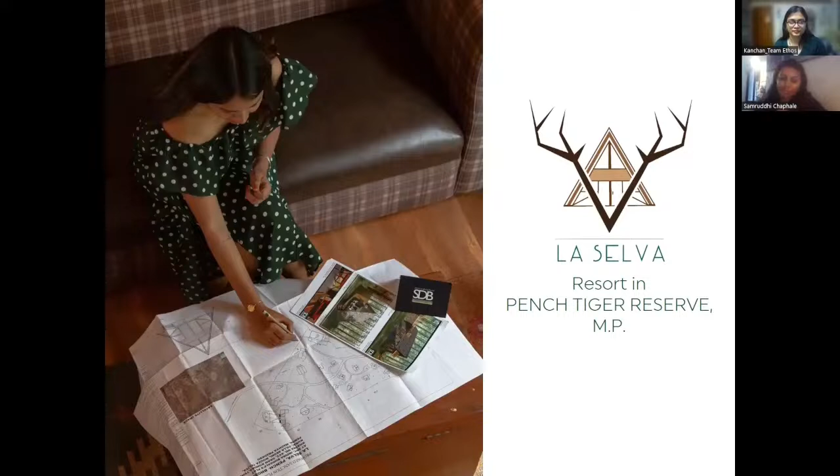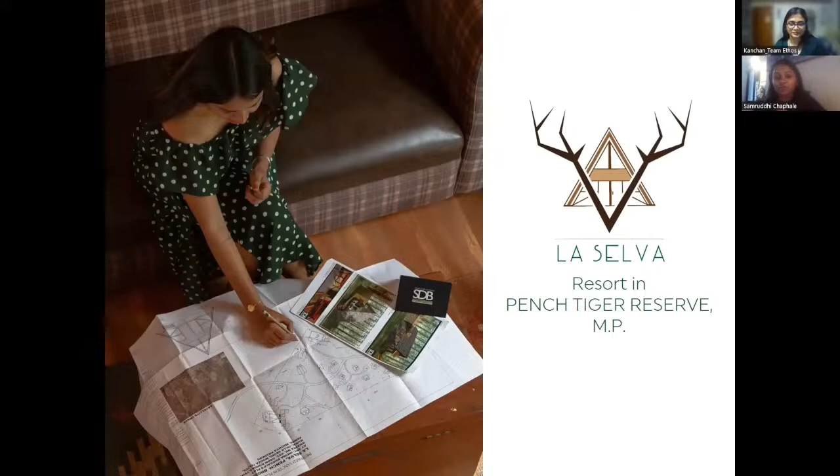Right. So the first presentation is about my recent project, La Selva Resort in the Pench Tiger Reserve of Madhya Pradesh. This project has been very close to my heart. First of all, it was the time when COVID had hit. That's the time it had accelerated and then we had to push it back. So it took almost about 2 to 3 years to complete. But the way it has turned out, I think it will really deliver on the topic design around environment.

Now, when I visited the site, it was during the summers. That time it was a fall season wherein a lot of leaves had shed off. And still when I was at the site, I could see the proportion of the site being that of a boomerang. I'll show you in the next slide, the master plan slide, where you'll see one flank of the site is completely dense forest versus the other side is a farmland, and then you see forest ahead of it.

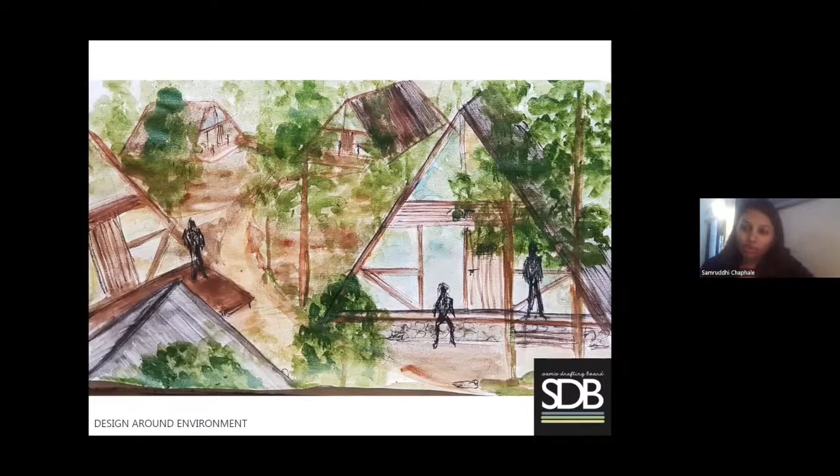So my architecture had to respond in such a way that it is overpowered by nature versus architecture overpowering the nature, which is why I thought of going for organic design. Wherever I find a spot where there are no trees, I'm going to put my built block.

So this project is a resort. There are a few amenities like the pool, reception block, of course some utility block, restaurant, spa, and then there are some places to live, like cottages, tents, dormitory, these kinds of things.

So all the residential parts, the quiet areas where you need privacy, are placed in the foresty zone. And then I secluded that by placing the dormitory, the kitchen, and the pool on the farm side. Also, the placement of the pool is strategic because it is situated in a farmland where afar you see the forest silhouette. So I've also raised it to a height of 8 feet. Then you will be able to appreciate the beauty of nature in a better way.

And it was such a wonderful project in the sense that the first 4 to 5 site visits I had to do only to understand where I'm standing. Because anywhere I would stop by, it would look as if I'm in the same spot, because all the trees look the same. So the triangulation method that we generally apply to place a block was just a supportive drawing, to be honest, because I had to make sure I'm standing there.

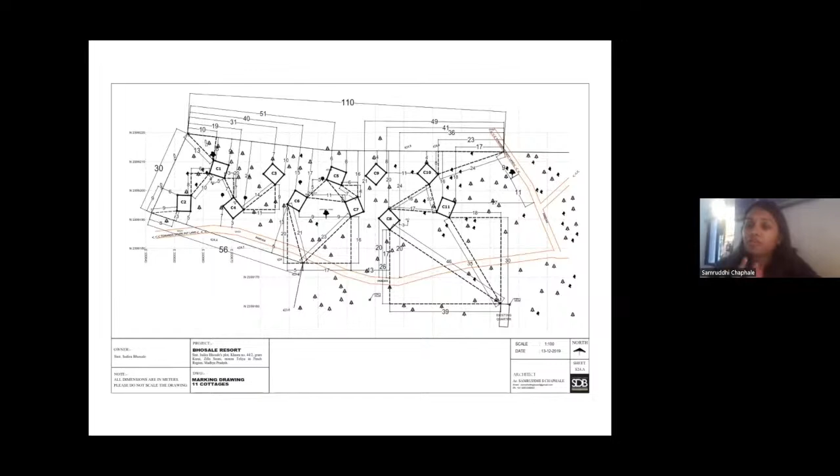So this was a visual presentation of why I picked the A-frame. Now, the A-frame is a structural system built mostly in the West, firstly because of the weather conditions, and secondly because of its very unique form. It is a traditional form, but it's not practiced so much because there are a lot of unused spaces, since it keeps receding at the top.

But then for me, here comes the approach. Especially today in the modular industry, architecture has also become a little product-based, where people are selling modular structures. There could be two approaches to it. One is to highlight the structure too much. And second, you are context driven. You want it to form a part of your site, and that's why you're designing it.

So I went ahead with the approach that, okay, A is a very strong shape or a strong profile, but I am utilizing it because it will look cozier. It will fit in the context well. You almost can't see the second cottage, the way it is placed.

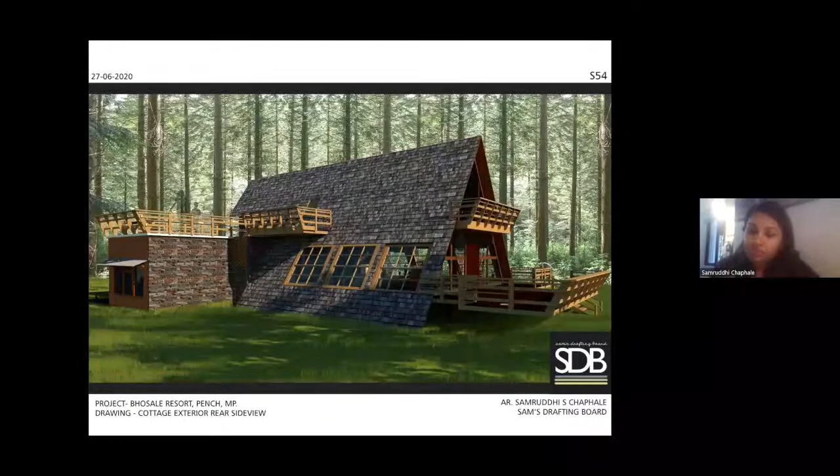And of course, the material palette, the glass used, the shingles and their color, the wood, the interiors with the wooden cladding, make it look more tucked in and more nature-like. So that was the approach, and I think it has served the purpose. Once I show the final pictures, you'll have better clarity. So I'll just flip faster. These are just regular floor plans to understand.

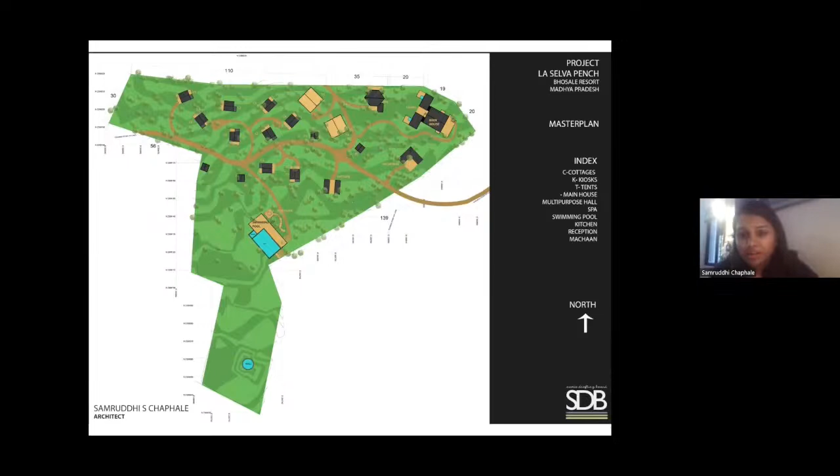And the reason for it was, there was this one tree which was not like the mahua trees. These are the mahua trees, by the way. But there was this one evergreen tree in the forest, which was huge. And we loved that tree so much that we wanted it to be a part of the project. So trees were a reference point, just to say.

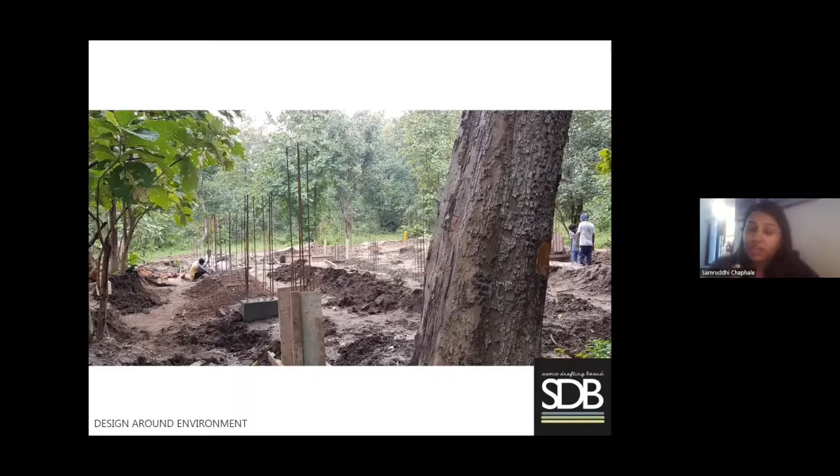So the base structure, substructure is RCC. Also, I have ensured that there is not too much wet construction happening here, so that we save on the resources and we make it as close to and relevant to the environment aspect as possible. So because it is a bigger structure, a bigger span, we had to go for an RCC foundation and footing and columns being raised to a certain height. And this is how you see the slab getting.

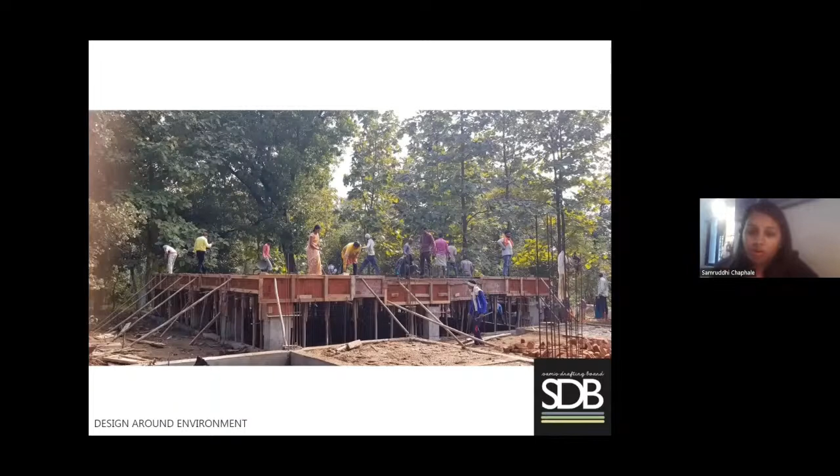So there is a reason why I have raised this particular block to a certain height. It is raised at 1650 mm. One, not too much to make it inaccessible for somebody who is not so good at walking, but B, also because I wanted to make sure that when you're standing at the deck, you only see the trees and nothing else. You don't see the bark, you only see the leaves surrounding you, and that is pretty much achieved in this one. So this is how the structure kept going.

Now in this particular picture, you can see how the steel has been stopped at the beam level. But in my design, I wanted the roof, which is also the wall component over here, the shingle bitumen sheet that I've applied, to go all the way down. So for that matter, later on, I've added extensions which are lighter in weight in steel to support the profile of the form. These are certain technical details.

Now here, this is a structural detail given by my structural consultant, but a lot of things you need to change on site also, obviously with due permission and understanding. So what I understood was I don't need an offset from one of the sides. There's no need. Why is this offsetted beam made?

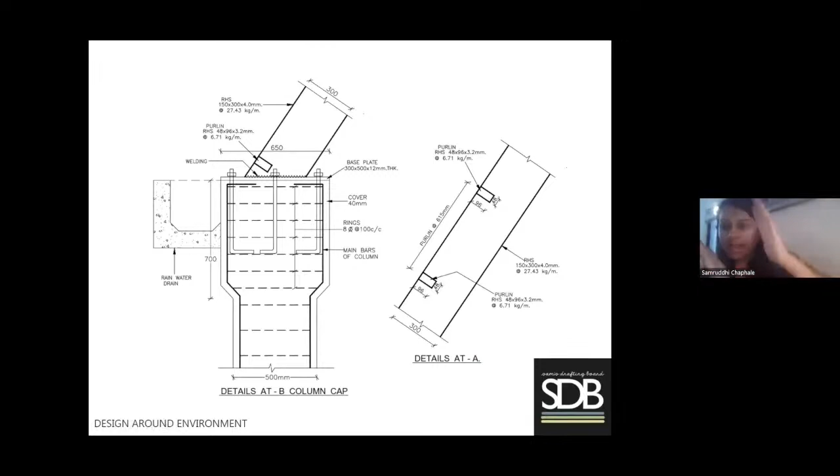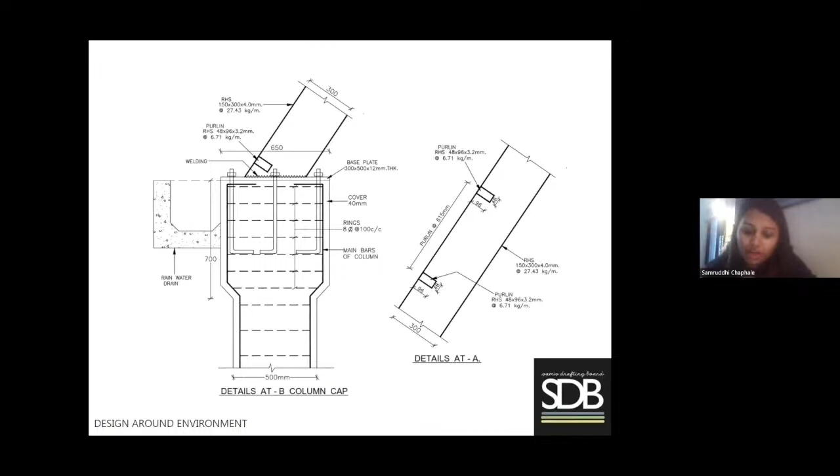Because the A-frame is an angular shape. So as it touches the horizontal plane, say 300 mm is the pipe size, but when you place it and cut it horizontally, it will be larger, right? So I don't need offset on one side, and I changed it on site. So these are certain logical decisions that you need to take while you are at site. And this is the particular detail that I was talking about. I don't need to create an offsetted beam on either side.

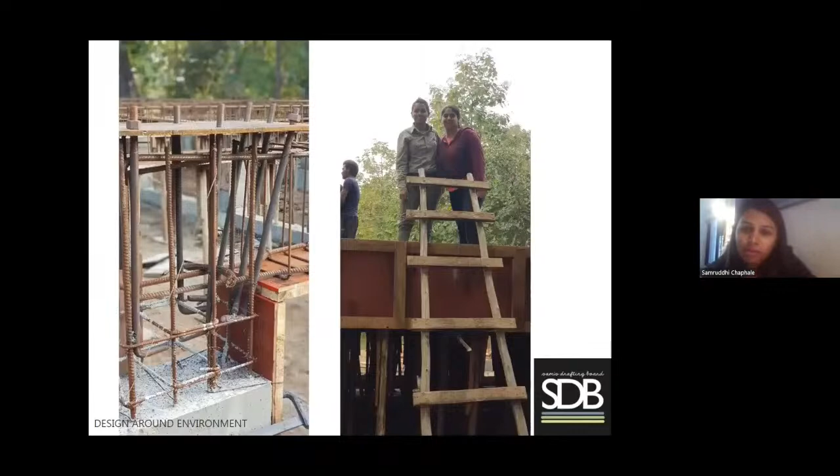And this is one of our pictures during the first slab that happened. It is me with my intern, Palak. And these are certain technical details in terms of the roof, the entire structural part, the plate that holds it, the gusset plates and the purlins and the principal rafters.

I wanted to make sure that the structure doesn't look too heavy. So, even with regards to the decision at what height the horizontal rafter should come into picture, whether there is a mezzanine also, and whether it will come at the eye level, all these decisions are very important. So accordingly, the structural integrity was planned.

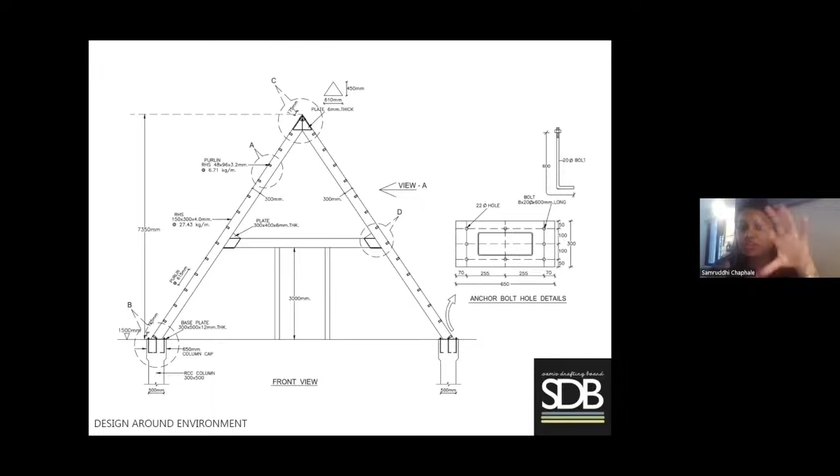Angle: now there are no set methods or set drawing regarding what angle this should be. I have referred to a few A-frames wherein the angle of the A-frame is such that it is too pokey, it is too steep. But I derived my own derivation of keeping it at 66 degrees, which gives me a very good proportion and a very good slant to the A-frame.

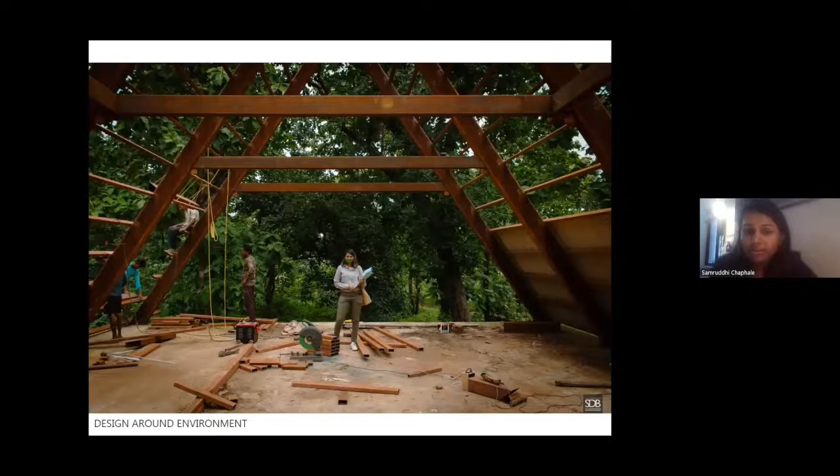So this is how it looks now. You can see in the background, there is the tree I was talking about. And it is only at this height that I'm able to have that deck feel I was talking about. Here, the deck is not constructed. In the next few slides, you will have it. So this is how the steel construction is used for the superstructure. And step by step, you can see the construction is happening.

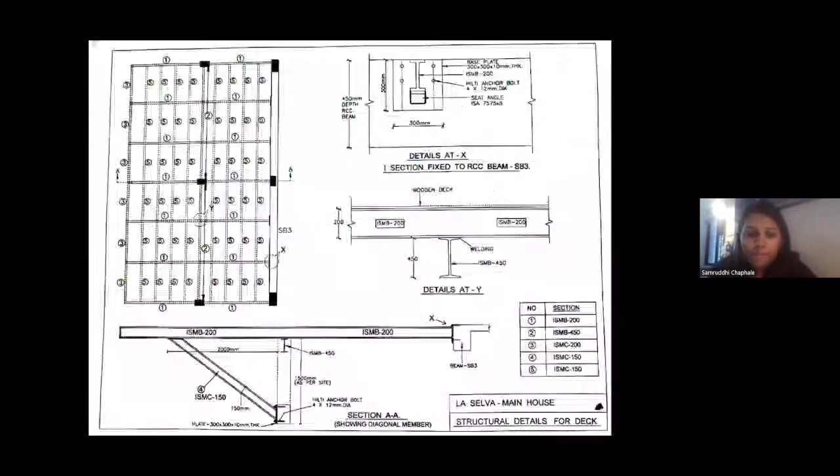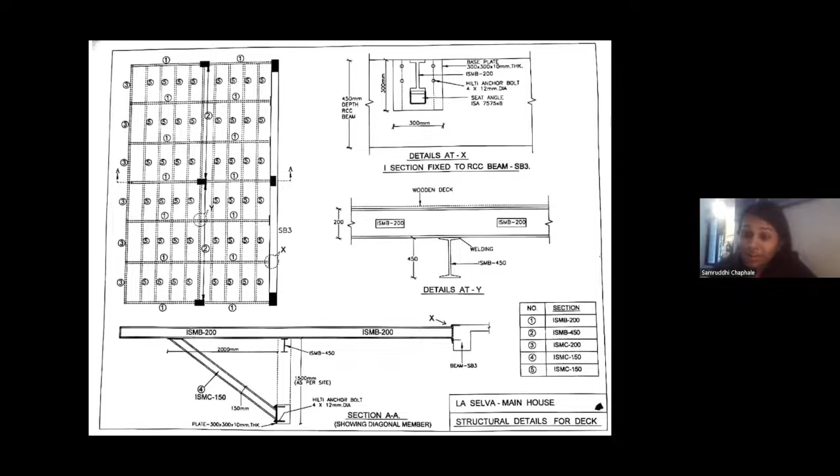So, very important thing, this deck that you see in the picture, it was very important for me to again have it cantilevered. So this slanting detail that you see, in angle, you can see that ISMC 150. That detail is very important, because if I had gone for RCC, like again columns, then it would have made the whole structure look not floating, very boastful, which I didn't want. I wanted this huge structure to actually get merged in the nature. And as you'll see the pictures, you'll see how these little decisions are really important. When you see the final pictures, you'll understand.

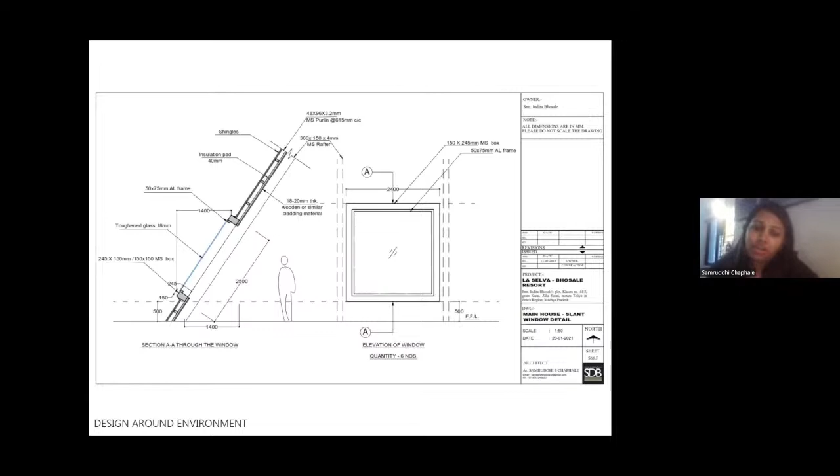If it is not properly welded, or if there is no proper silicone filling done, or that L detail that I'm talking about, you cannot stop the bitumen sheet or the cement sheet bang on at the joint. You have to turn it around. If you don't do that, leakage will happen. The wooden cladding from the inside will spoil. So these are very important details that you need to take into account. And this is that particular picture that I was talking about, why the boxing is important.

You can also notice the little balcony that I have put in the back. So this structure has a mezzanine on top, and that will be used for recreation. It could be a pool table or a cards room, those kind of things. And I just thought there could be a nice, cute little balcony coming out, and you get to experience nature from a different perspective. So I'm trying to create these focal points here and there. People go to the jungle to appreciate the jungle, and that has to be best achieved in whatever ways possible.

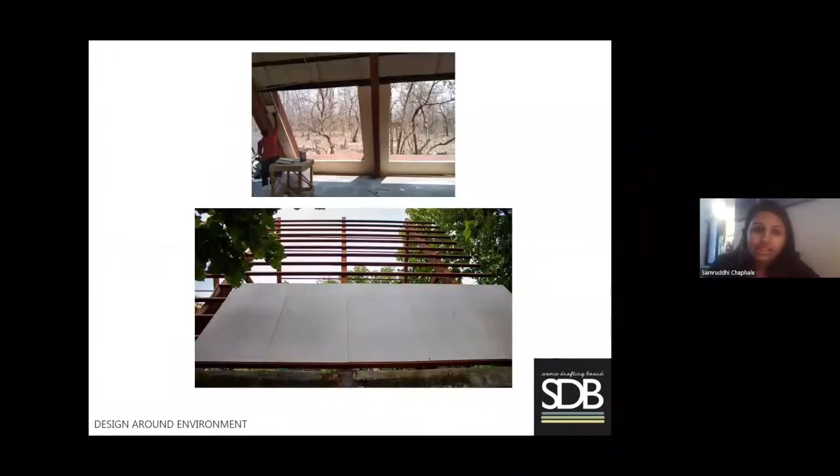So this is the tree. I'm highlighting the tree way too much, I think. You can see the internal cladding and the external cladding in these two sheets. And this is that structure. Such a big structure, and the decision of having a cantilevered deck was so important, because you can't see anything. The supports that are holding that deck are not visible at all. And even though it's such a huge deck, at a height of almost 27 feet, you can't see the structure at all.

But there were some reservations. I mean, I had to do a little RCC construction as well, because of the utility part and kitchen part. So the kitchen block is on the left, and the general manager's room is on the right. And now I'm taking you to the cottage. I'm not showing you the final pictures right now. This was the construction of the restaurant, and I'll quickly take you to the rest of the blocks now.

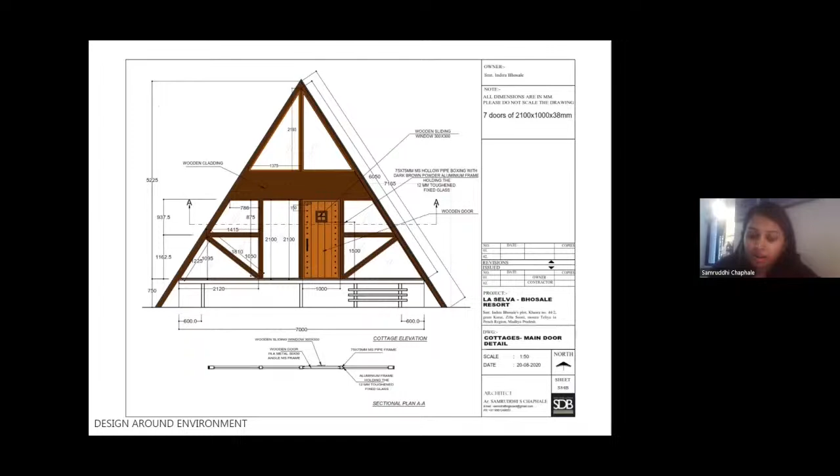So I'm not putting too many slides with the plans and all those details, just showing you the form and how the glass is cut very differently in this particular elevation. Just to add to the little drama, this is being done. And these were just some visuals to make the client understand. But this is what the construction is about. Again, it's a steel construction. The little bit of civil work you see is only the toilet block.

Interesting part about this is these were haphazardly placed again. I had to make sure that it's first tucked in the forest. So wherever there were too many trees in that belt, I have placed it. Secondly, it has a deck on the front part as well as on the back part, right next to the toilet block. So a lot of times, wherever I'm placing that block, there was a tree right where the bathroom is coming. So I have actually flipped the internal plan to accommodate that tree.

So the bathroom comes on the left, and then the whole furniture layout, if the bed was on the left, it would go on the right, and vice versa. So there's no ego when it comes to nature. That's what I'm saying. You need to alter your design when you're dealing with nature.

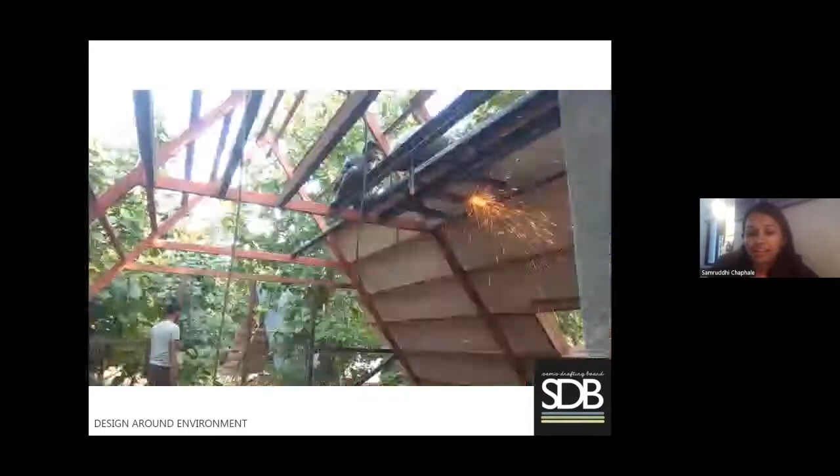And yeah, the mezzanine is getting fabricated, and I'm just showing step by step the structure. Notice the scale. Look at the size of the leaves and the size of the human on the left, and then the scale of this cottage. It is almost hidden. These are some of the window details. In the drawing you see a casement window, but I have a regular sliding window in practice. This was one of the options. And you also see I have dared to have certain skylights, or certain fixed glass, on the sloped portion of this. It has really added that touch. You'll notice it in the final pictures.

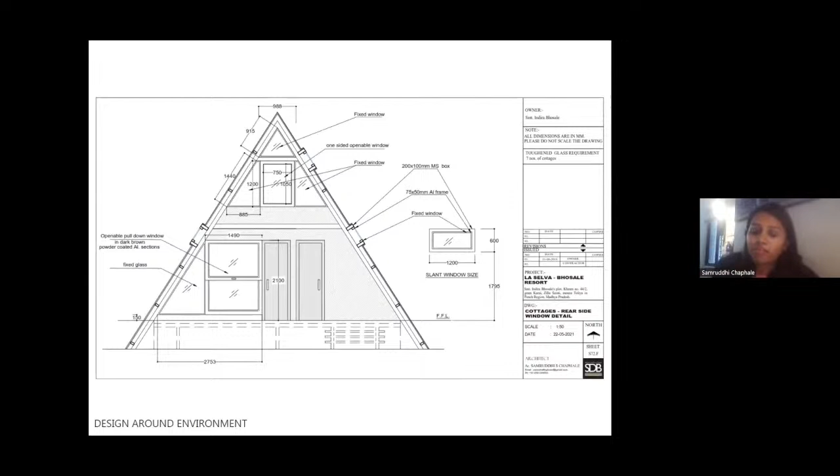Ventilation has been very well taken care of. On the top you have a sliding window, in the bottom also you have a sliding window, so there's no problem with that. This is a funny picture wherein the workers have just come out from that particular fixed glass. Yeah, and these are some of the cottages in the middle of the construction. You can see the shingles being poured, the cement sheet, the internal wooden cladding. Look at the selection of the veneer.

We were not very sure of how to access the mezzanine because the block is cozy. So we went with numerous options of having a ladder, of having an L-shaped staircase, but then we ended up having a spiral staircase, which you see being put here. It went very well with the circulation and the overall furniture plan.

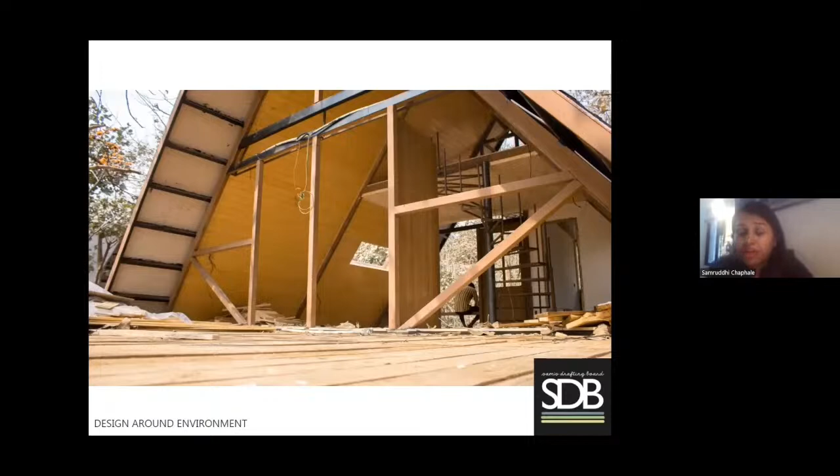These basins are also custom and tailor-made in wood and oiled so that they don't spoil with water. And things like having all three sides with glass, so that even when you're in the bathroom, you enjoy the beauty of nature. As I share the final pictures, you'll get to see it. And very little details, as you see, I was trying to develop this toilet paper holder. Whatever pieces of wood were left, we tried to make something out of it. Such details are very important. The finer details actually give you that end result.

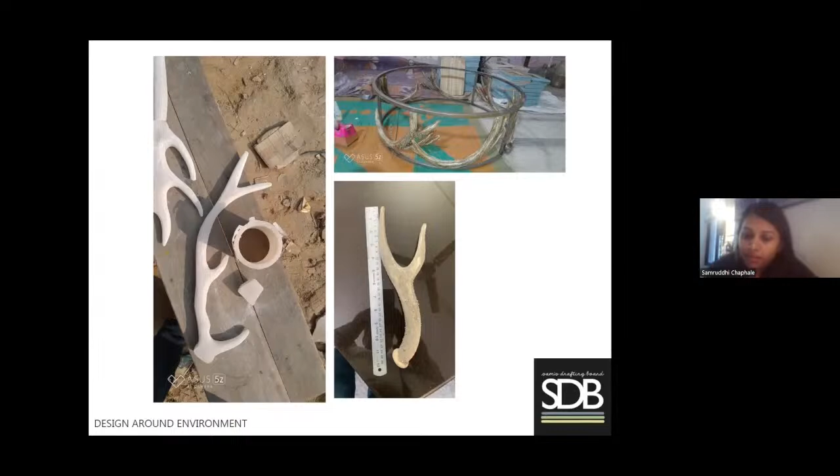Now I'm taking you to the tent before I reveal the final pictures. There's a tent block. It's a tubular steel structure. Again, there's a lot of usage of glass in order to make sure that you have the inside-outside connectivity. So these are some of the blocks that are pending. I'll show you quickly, not in detail, with the shortage of time that we have. So it's a canvas structure, which is why it was important to go for tubular steel details. Otherwise, how will you hold the fabric, if there are too many joints to it?

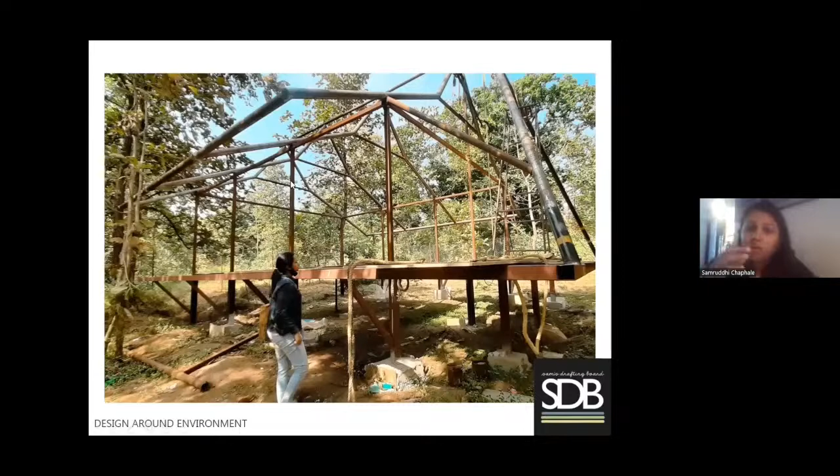Hence the tubular. If you notice, this tent structure is not a regular tent. It has been tailor designed to suit the A-frame concept that is going on through the project. So notice these little triangular scoops, which still make it closer to the theme running around the whole property. So this is how it was while it was developing. Just one of the plans and elevation, just to explain, this is how it looks now.

Now coming to the swimming pool, as I was saying, it was such an important decision for me to raise it to 8 feet height. Imagine if it was at the ground level, you wouldn't be able to appreciate nature the way it is being appreciated now. And I utilized the lower part of the swimming pool for utilities such as the shower areas, the cubicles, the basins, and all those things. So this is just a layout and a section and some side photographs to show you how much context matters for you to take the decisions.

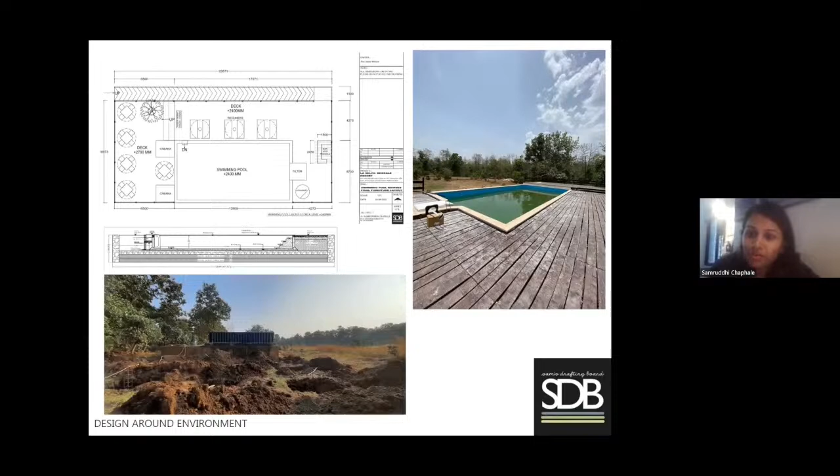Also, if you notice, all the cottages are in the forest area, whereas the swimming pool has a backdrop of the forest but a view to the farm. So I hope you're getting to understand the drama. I hope I'm able to deliver that to you through my speech, what I'm trying to say about when these decisions matter. And this picture completely tells that.

You see the backdrop of the forest. So the swimming pool is bang on marked at the site where the forest meets the farm, on that border, literally. So you see a little bit of forest at the back, and as you see on the front, it's all farm. Notice this long ramp that is actually taking you to that height. So it is comfortably accessible for anybody to utilize it. It's well proportioned at 1:12. So you have this ramp followed by the deck, and then you have the pool.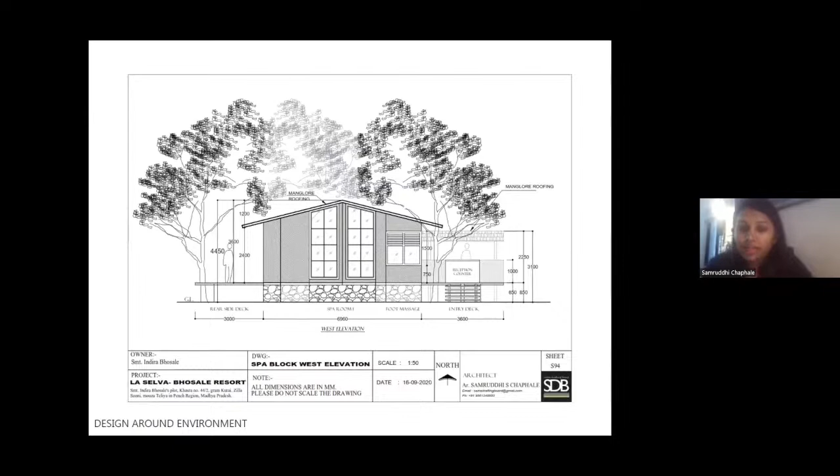So this is actually a side elevation. When you see this, it looks like a main elevation, but it is the side elevation. You'll get it in the next picture. Because of this roofing style, I got to develop my column in a different shape again. So these are responses to design. And again, why all of this? To make sure that these 4-5 trees do not get cut. In fact, they form a part of the architecture.

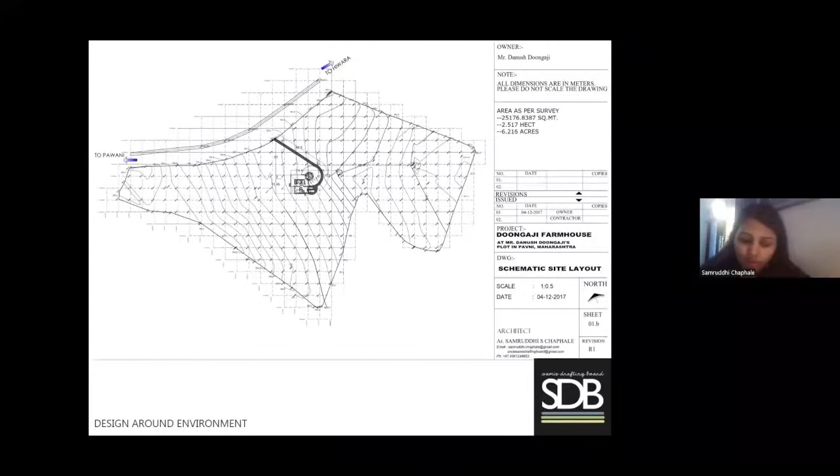I mean, I could have made it a part of the veranda, but they didn't somehow want it to be infused through, so there are some client limitations there. This is the site. I won't go into the vastu and all of that in detail with the shortage of time, but this is how it pretty much looks. It's a typical Mangalorean roofing project surrounded by courtyard on all the 3 sides, and again use of a lot of reclaimed stuff.

And my client said, Samruddhi, mujhe jitna mere paas saman hai. Now the client is a Parsi, and the Parsis are holders of reclaimed wooden antiques and furniture, jo bhi unko milenge wo save karte. They appreciate history. So not just that, but the client had a lot of these stones which were literally punched within the soil of the farm, and he said, "Mujhe ye sab use karna hai ghar ke liye." So I said, okay, let me take that challenge.

So I enjoyed this project with the fact that again it was a lot of being on the site, being like a Laurie Baker, taking certain decisions कि okay मिस्त्री ये ना पत्थर को ऐसा chip off करके देख ले, छोटा पीस बना सकता है तो मैं उसे cladding की तरह भी use करूंगी. So I've tried to use that stone in multiple ways.

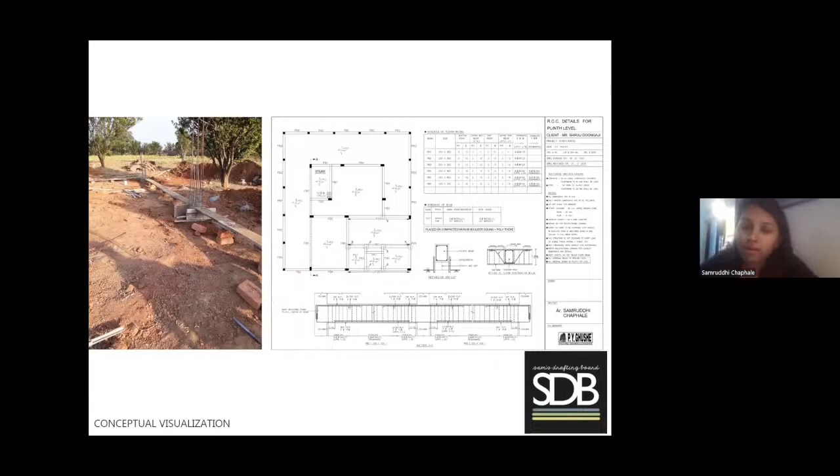Yeah, this particular point I want to mention, the ground beam. Here at 4 feet we got a yellow soil which was not that stiff, which is why we came up with a floating beam detail, where the beam cannot stick to the ground, because then it will start developing shrinkages. So how do you save the elevation, because the beam will look floating? So again, that stone was used in the form of slates to hide the gap, and also not allowing rodents and all to get into it.

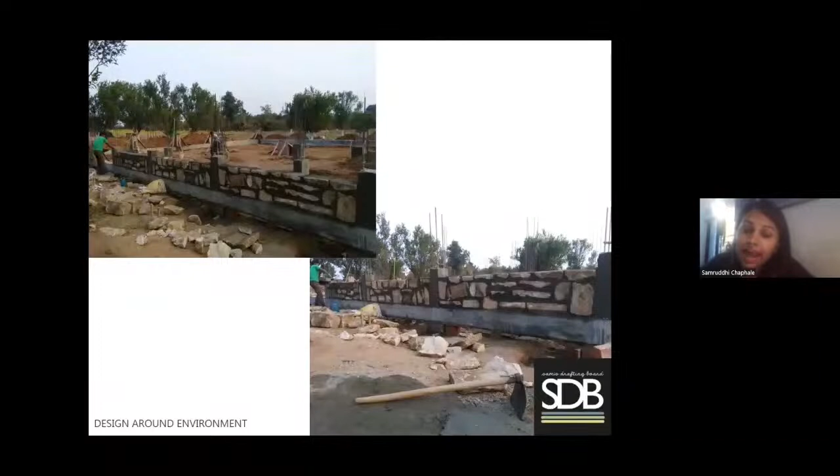So this is that beam. And these are the stones that I was talking about that were available at the site. And I've tried to use them, not clad it or anything, but real stones are used for the plinth. And this is a typical construction. This is the typical plan.

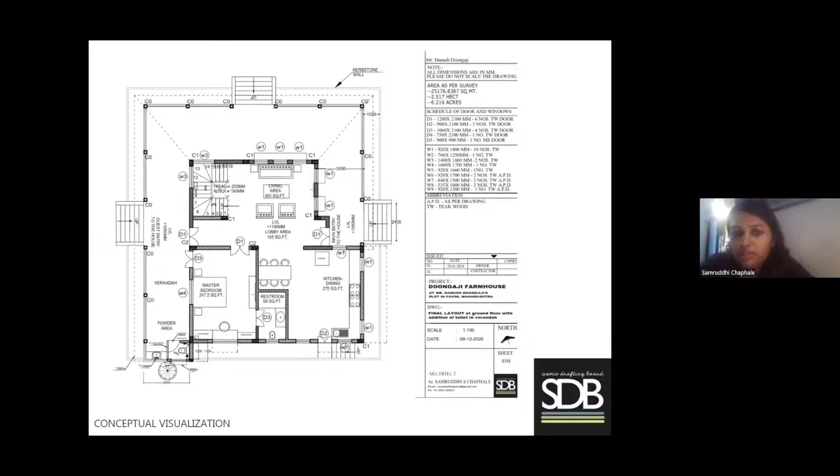It's a very open-ended house where you have open kitchen, open living, and the windows and doors are planned in such a way that it is well circulated and all of that. It has a floor on the top with the terrace in the front and 2 bedrooms in the back. And yeah, this is how it is pretty much coming into construction.

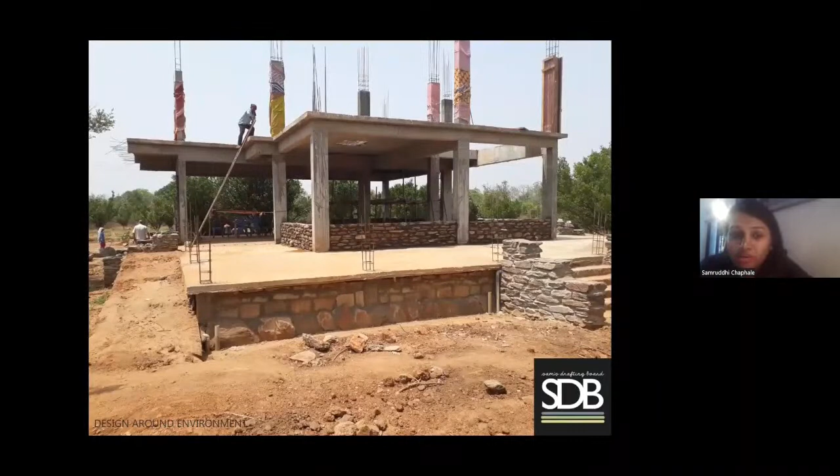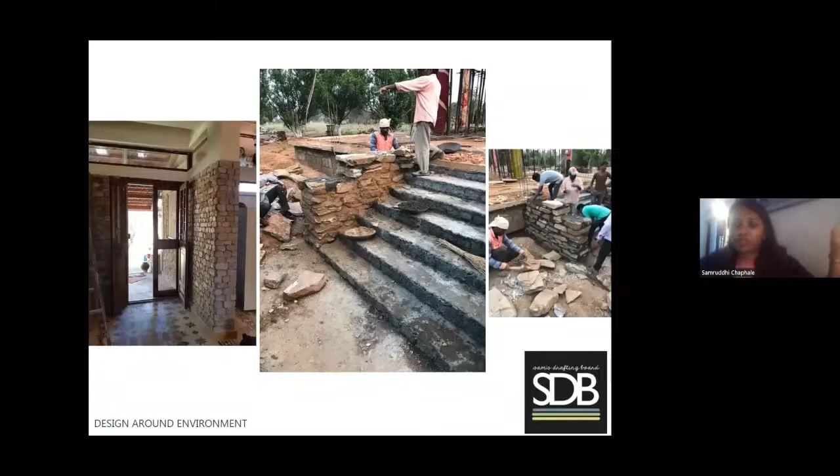Notice the second layer of stone now. Again, it's a stone clad wall being done till that height. So अंदर से भी stone दिखता है. Now imagine, I'll show you in the next picture. So just notice in this how the stone is being utilized in different forms. I've also used it as a cladding component for the interiors. And these are the same stones which are this big. I have reduced it, chipped it down to those smaller pieces and used.

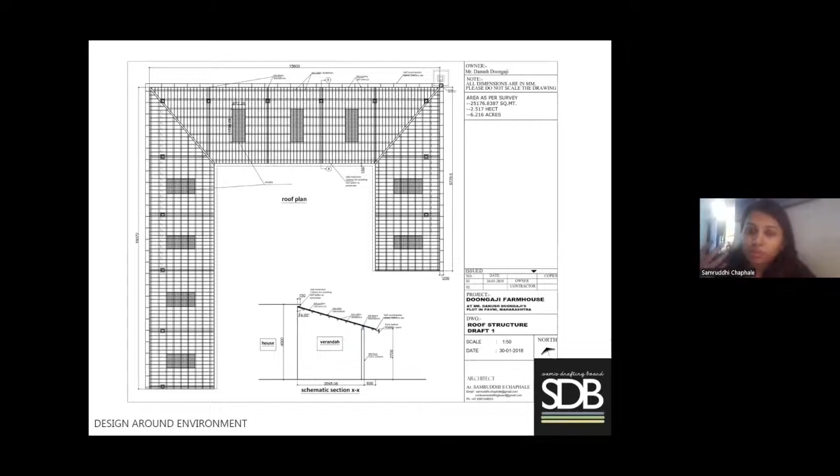This is one of the elevations just to show you how the design would come by. The roofing. So we also had to make sure that roof has a little bit of glass, because these are like 12 feet wide verandas and it will be dark then again. So skylight ke liye hum log ne transparent kavelus add kiye hai in this.

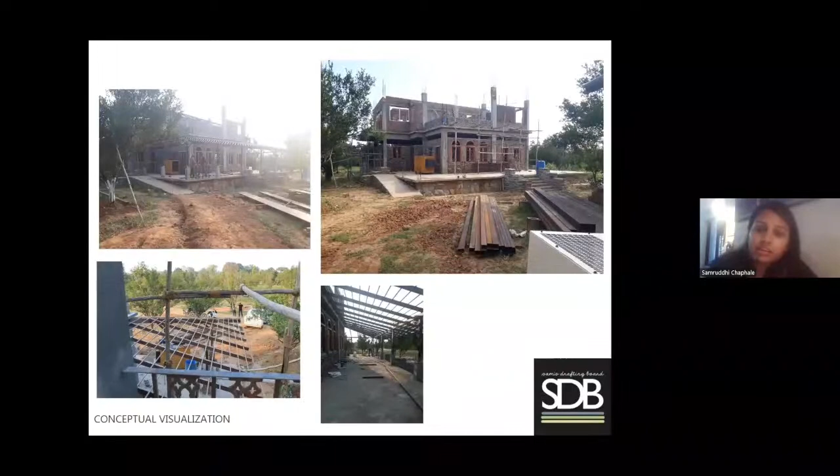Yeah, so this is how the build is. Now it looks massy, right? Because it is not finished, but the little details, the traditional details that I've applied, the antique details, don't make it look that heavy once it is complete. Notice the Y-shaped columns, the pipes that are holding the roof of the veranda. And you see the little detail where the same stone is being chipped to smaller versions, and it's being used for the cladding of the columns.

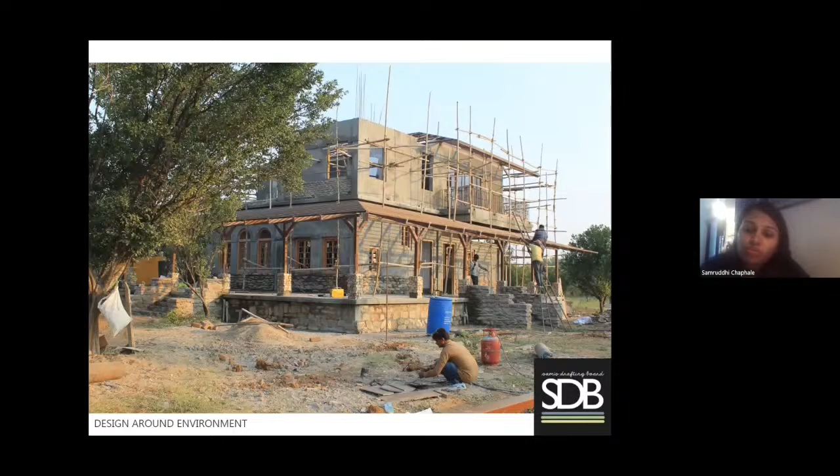And this is the staircase that I was talking about. Again, it's a reclaimed second-hand staircase, but it was not in this condition. Every tread was broken and kept here and there. I had to get it assembled, check if there are actual pieces, and create a metal staircase to hold it. Even the balusters were missing. Some of them got made and then made a jigsaw puzzle out of it.

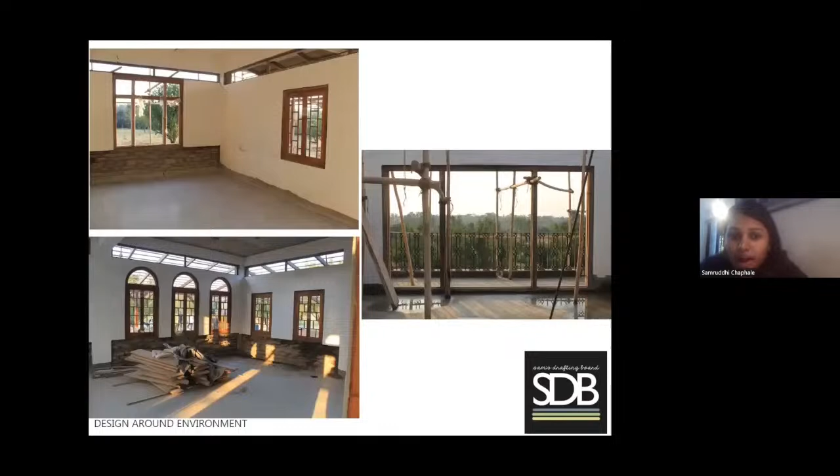Notice the tile in this second image on the right. The tile patterns are also very different because these are second-hand tiles, and whatever tile I got, I've just created patterns out of it. And now again, notice the clerestory band I've given on the top. That was very important because my client wanted sunlight every time of the day. So that's why I added that band.

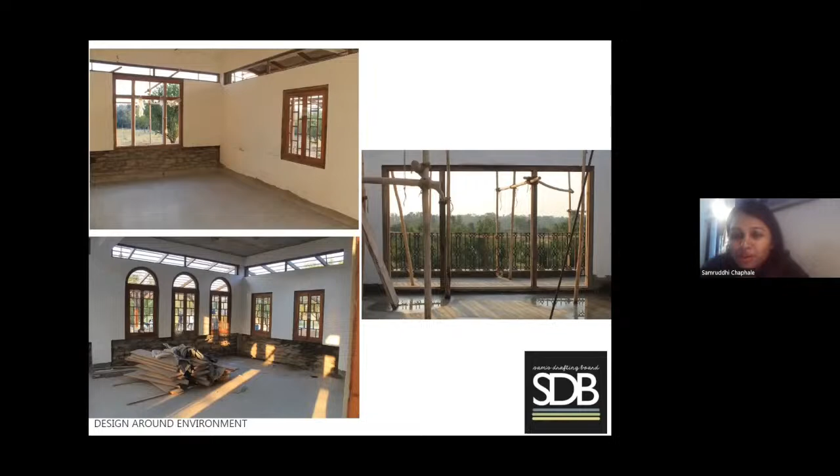All these windows are reclaimed, but these arches weren't a part of this window. I just found those pieces again in a storeroom, and I was like, let me check the size. If it matches, I will just put it on top of it. So things like that. The image on the right, the full height window, we were earlier thinking of going for UPVC, but honestly, it saved us a lot of cost. I found some doors at the client's place again, and I was like, I'll use the frame for the window, so it will be like a full length window. You'll see in the next images.

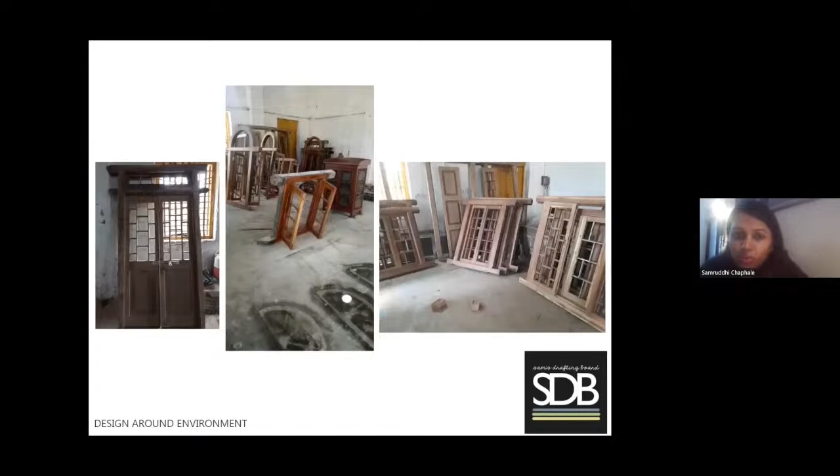So these are the reclaimed 100-year-old doors. They are looking still in better condition because almost 2 months of ghasai work has happened to make it look like this. It was painted, and imagine 100 years. In our homes, every 5 or 6 years, we get a house painted. So imagine in 100 years, how many layers of paint or coating whoever has used that window or door must have done. So to scrape it all out, because it was all white.

Then the doors were shorter in size. The left image where you see the door, in olden days, there used to be a louver on top, right? The vent. And the client, everybody is too tall. So we had to make sure we remove that and we add our own extension and all of those things.

Then again, DIY, rainwater. I had gone during one of my travels to Sri Lanka and also Goa. So Geoffrey Bawa influence as well as Gerard da Cunha influence from Goa. I found chains that are used to collect rainwater. And I liked that detail a lot during both of my travels. So I've tried to incorporate that in my project versus using PVC pipe.

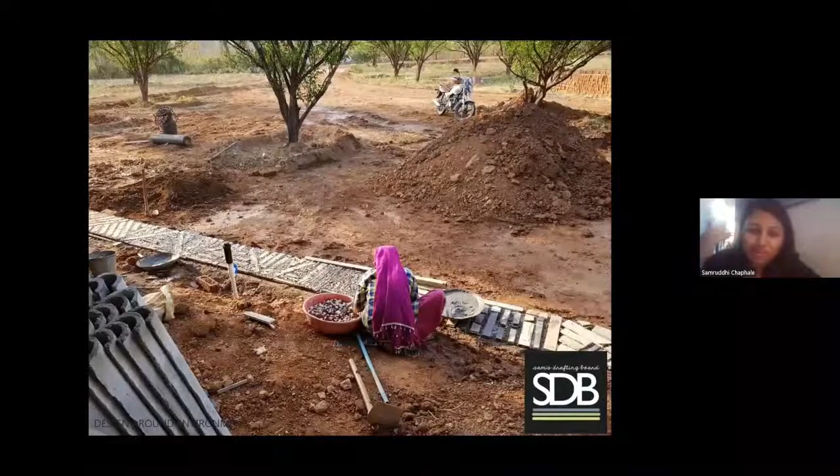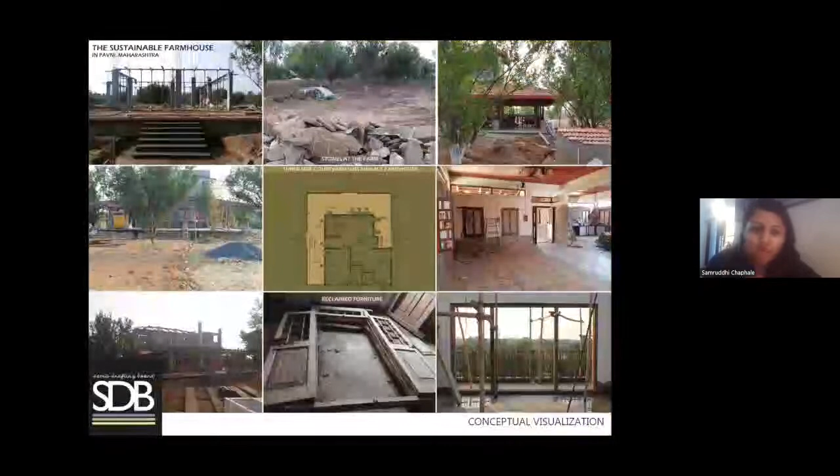And these are just reused chunks of stones. We have left no stone unturned in reusing whatever was available. The broken parts of the tiles have been used with a little churi just to form a pathway in the middle of the garden. And this is a little collage of how it started and what all elements have been used. But I think I'll show you the final picture. So this is how it looks now.

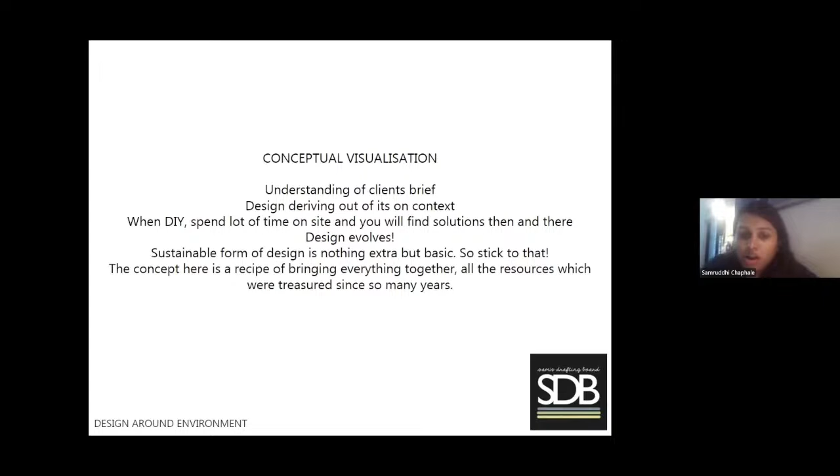When you DIY, spend a lot of time on the site and you'll find solutions then and there. I've shown you some examples with regards to rainwater harvesting and the way stone was used in different forms. Those were decisions that I took on site, literally. Then, sustainable design is nothing extra but basic, so stick to that. And the concept here is a recipe of bringing everything together, all the resources which have been treasured for so many years. So thank you.

So that was a wonderful and very insightful presentation, Samruddhi. Thank you. You've very wonderfully illustrated how to inspire the next decade with your designs. I'm sure our viewers will appreciate it and learn a lot from your presentation. And curious to know more, I would like to take this opportunity to ask you a few short questions.

Through your works and workshops, you emphasize conceptual visualization at the beginning of the design process. In your own design process, what are some of the inspirations for the stories that you like to tell with your projects?

Okay. So honestly, my inspirations come from travel or the site I'm present in. I am not, I think, following any particular architect or any particular style. If you look into my entire portfolio, it's qualitative versus quantitative. That's what I'm trying to live by. It's more like a lifestyle to me. There's not much of a shift between my life and my work life.

I think I'm trying to pick opportunities which resonate a lot with 2-3 components. I would say, like, I love challenges. I love it if I've not done something before. And then I look into the context and the brief. So there is no particular vocabulary, if you notice. Of course, there are certain things which I don't want to do. I'm very clear about that when it comes to my own style.